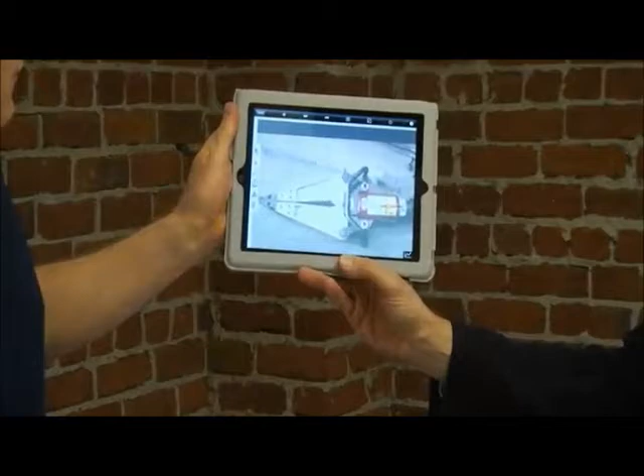What's it called? This is just a model of what I would call the jaws of life. So if you look at a photograph I took here, simple jaws of life - these are the pneumatic devices that are used to pry people out of...

But let's start. What are we even looking at? What application is this?

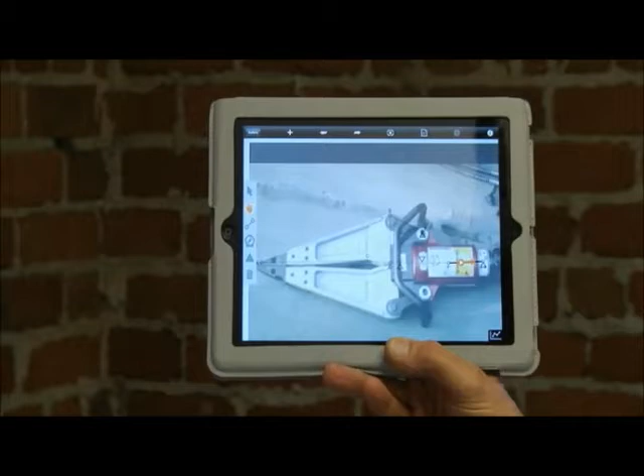Sure, where are we? I'm in a free app called Force Effect Motion. So it's an iPad-based app, right? Is it on Android as well? Soon, soon. Right now it's on iPad. There's Force Effect and Force Effect Motion - this is Force Effect Motion. And these are free. If you have an iPad, go to the App Store, download it, and here it is.

Okay, now this particular app, I took a photo of this, and I'd like to maybe design something similar to this. What I'm most concerned about is I need to size the actuator that drives this whole mechanism. I need to know where the hinges are, but when these open, I need it to open in a certain space at a certain rate. So before I actually design something in AutoCAD, I may want to sketch it up here based on looking at an existing design.

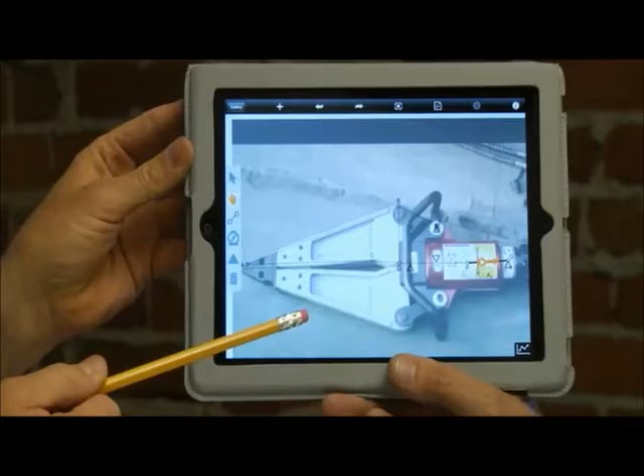So you're literally thinking about the geometry and the force relationships before you're doing the detailed design. I want to validate my motion, especially the tip right now - that was what I was concerned with. How easy was it to just place it? Is it like just sketching a line?

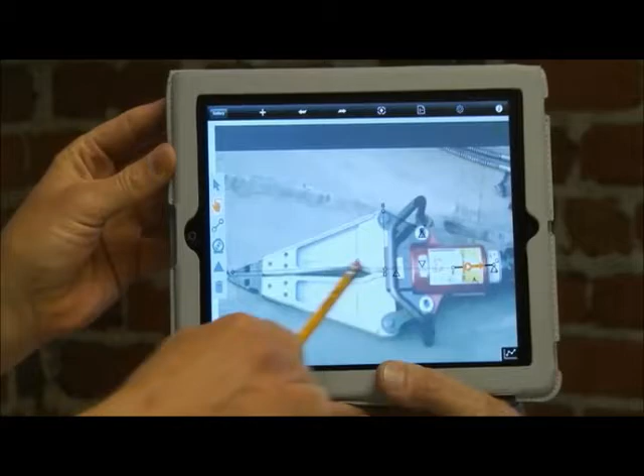Absolutely. You can see I've sketched 1, 2, 3, 4, 5, 6 lines, put an actuator in. All I see is lines in a picture - how is this different than just sketching something?

It's different because I've actually constrained this, and if I press this little button, you will actually see it - now I can actually see it. So you're actually applying the forces now. Applying forces, I have an actuator driving this thing. I have the entire mechanism hinged, so you can see how this opens and closes. And I've defined that point out there as a trace point because I want to see how that point moves, how fast, and how it accelerates.

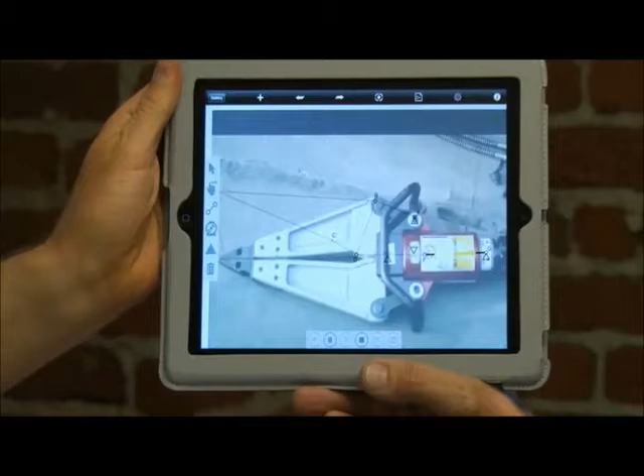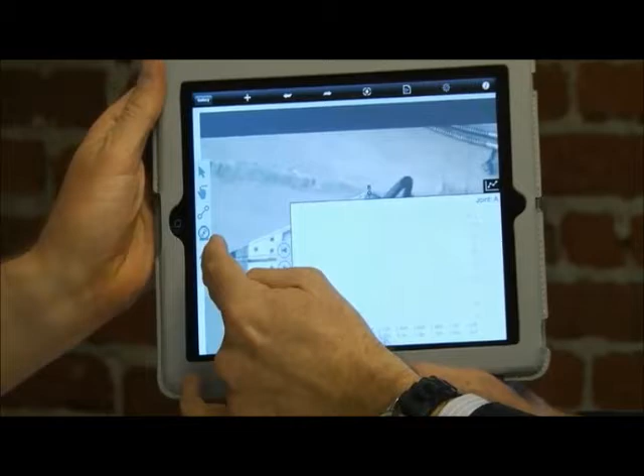So if I stop this for a second, I can take a look and open up a pretty cool little graph that plots for me at joint A, which is out here on the tip. I can take a look and find out how far it's traveled, and in what time. And if I want to close this, I can generate an even more detailed report by just asking for one to be generated.

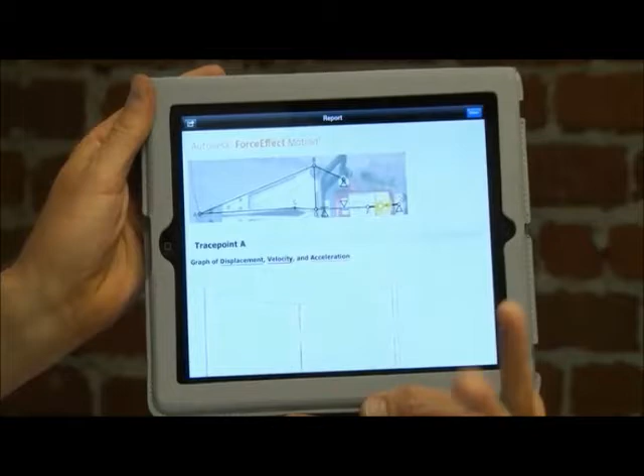And now you see, okay, cool - at Tracepoint A, which was the tip of these jaws, I can look at the displacement, the velocity, and the acceleration as a graph, and then even get a table - a much more comparative view - and you can bring that table into Excel.

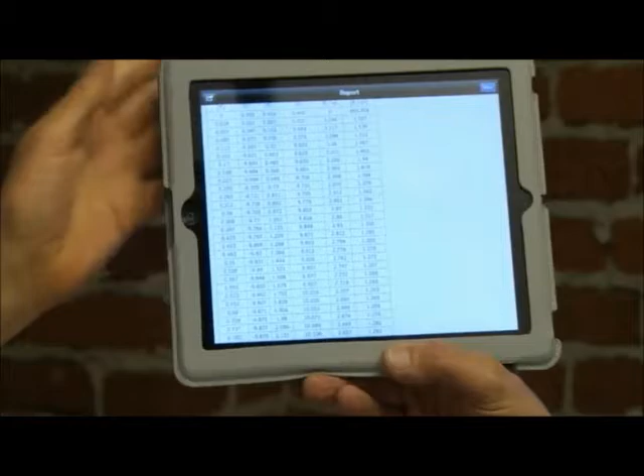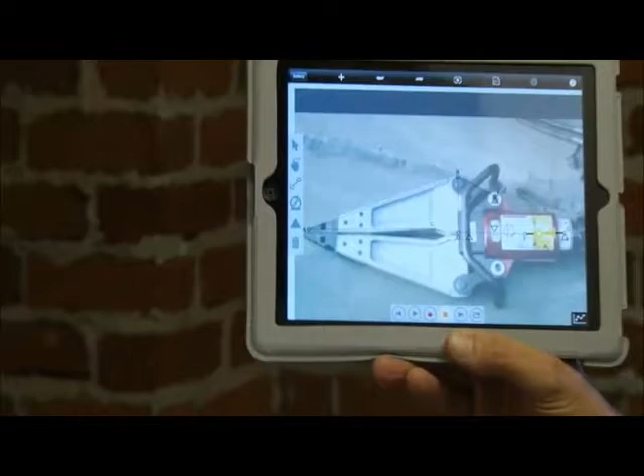So what's always interesting for the AutoCAD folks is how do I work with this in AutoCAD? How is this related to AutoCAD? This is great, amazing - I could be on the bus, I could be at home, whatever, I could start to figure out and play with the forces and the ideas.

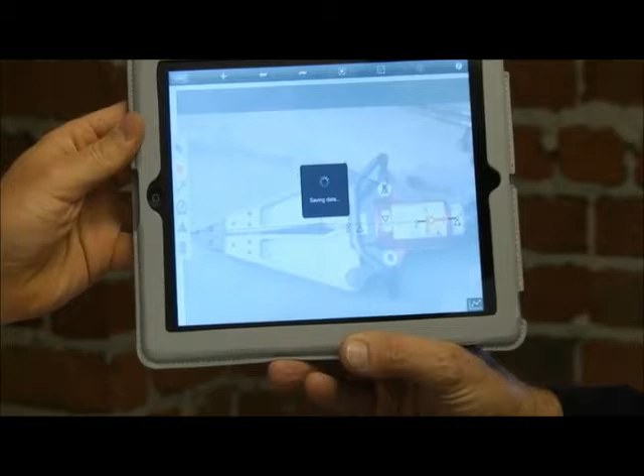To me, what's cool about this is now that I've got the motion I want, I've validated the velocity and the displacement's what I want. If I go back to my original gallery, I'll save it. And once I get back to my gallery in ForceEffect, I have a little button at the bottom that allows me to export this. I can either send the diagram by email to someone, or I can send it as a DXF.

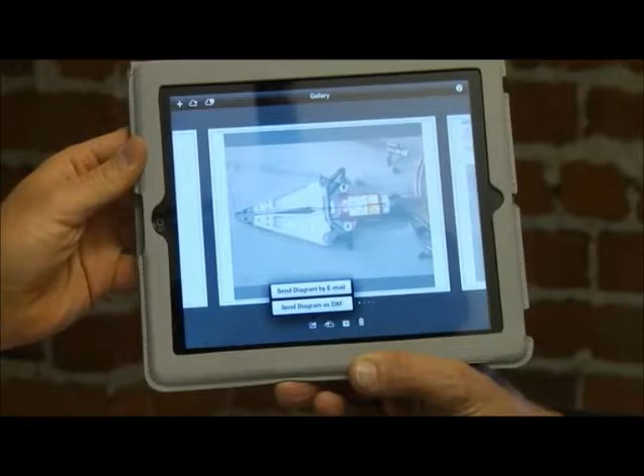Cool, so now I've got the basic geometry nailed down before I start sketching it out. Bring this into AutoCAD, and now I can do my good mechanical design - I can get much more detailed at that. But I already know, hey, the travel at point A, which is what I was concerned about, I can meet it - it's going to be what I want. That's absolutely great, that's great.

Very cool, so this is just a super simple 2D simulation that really helps you get there. And you could do this for a building, for like an awning, anything that's structural related - it doesn't have to be a mechanical product like that. Not at all. And what's nice about this is if I take a photograph and sketch over it, all I need to do is put one dimension in, and everything else on my drawing gets scaled.

I've had guys use the application to figure out how to put Christmas lights on their house. They measured one dimension, and now the house picture scaled up, and they know they need 30 feet of material. Engineers are strange, they come up with odd things. But in a design environment, if I just know one dimension, that's enough.

So are you going to come out with a Christmas light app? No, I haven't thought of that yet. But there's a market for everything.

Okay, well, so that's the iPad. What do we have that's more desktop, that maybe works directly with AutoCAD or kind of next to AutoCAD?

Well, Simulation 360 is our current offering on the cloud. It's an offering that AutoCAD users could be interested in. It's a cloud-based application that offers structural simulation, so you can do linear and non-linear structural analysis. Linear is when I bend it, let go of the load, and it comes back to the same location. Non-linear is when I bend it with enough force that it stays permanently deformed.

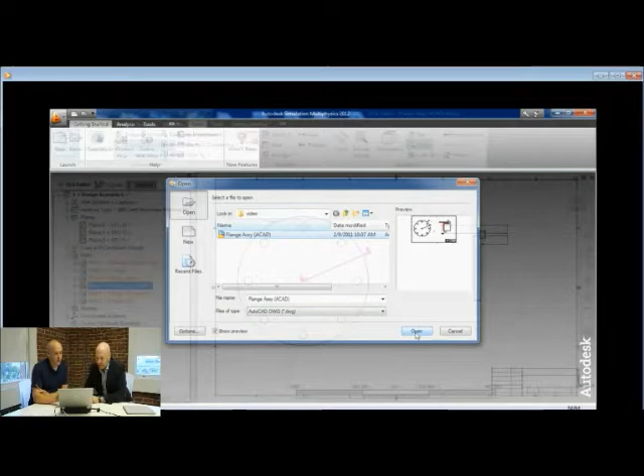Wait, pause for a sec, there were a lot of other files in there as well. So it's not just DWG, you could bring in an AutoCAD file, an AutoCAD DXF, Inventor files. If you so choose to use another CAD system, I don't know why, but you could bring those files in as well.

What's interesting about this is a 2D model in AutoCAD, a flange for a pipe. And what I was interested in was I have to bolt the flange together, right? That's what a flange is, two pieces of pipe coming together. And of course, what do I care about? I care about it sealing properly.

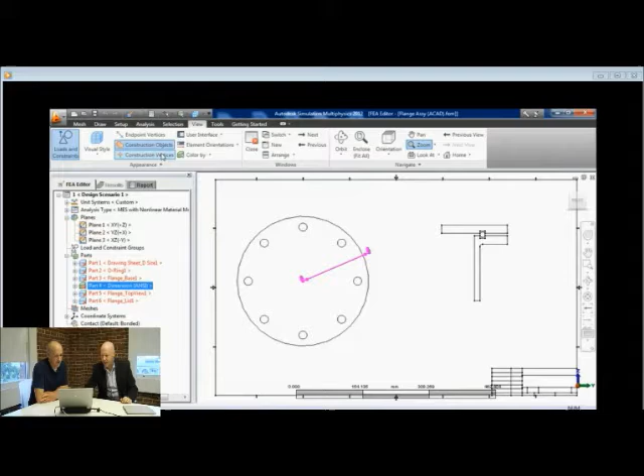So I want to take a look at this simulation and show you that I can import a 2D model very quickly, bring this into Simulation Mechanical. At that point, what I'm looking for is defining what I really want to model. Because it's in 2D, it's easy for me to take this shape, called an axisymmetric image, and if I rotate it 360 degrees, I've actually defined that part. But a 2D simulation is all I need to do.

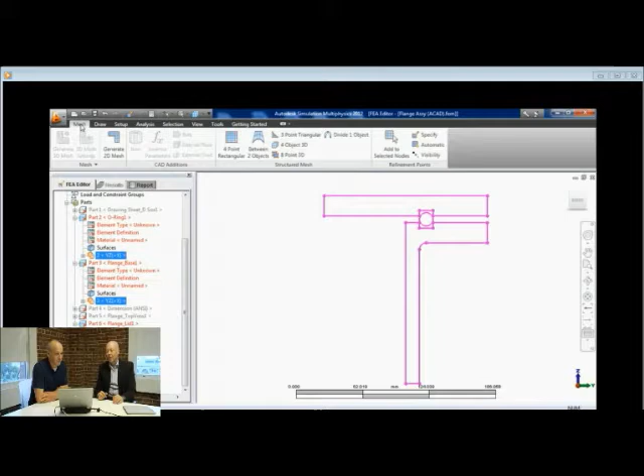I need to tell the program these are the pieces I'd like to create. I generate a quick 2D mesh very quickly, you can see the seal there in the center. Then I go in and tell it what I'm looking to do with it. What I'm really trying to do is define some motion, so I go in and say I'm looking to solve this model. It's axisymmetric, so the program knows I'm going to rotate it, the program knows that's right.

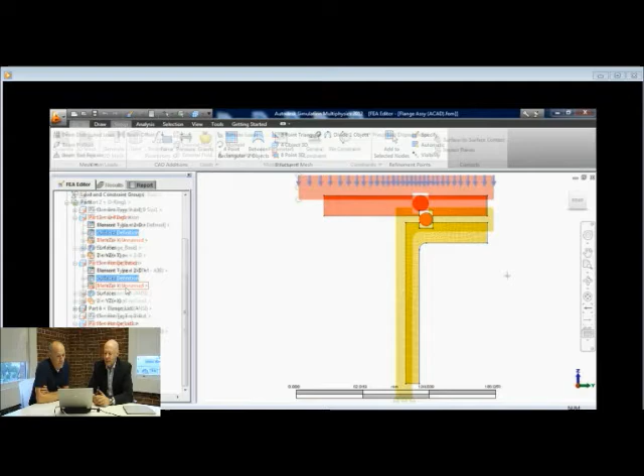I'm only looking at a 2D slice. I impose a deflection at the top flange and force it down over that seal. Once I do that, I want to make sure that seal contacts the inside there very, very well.

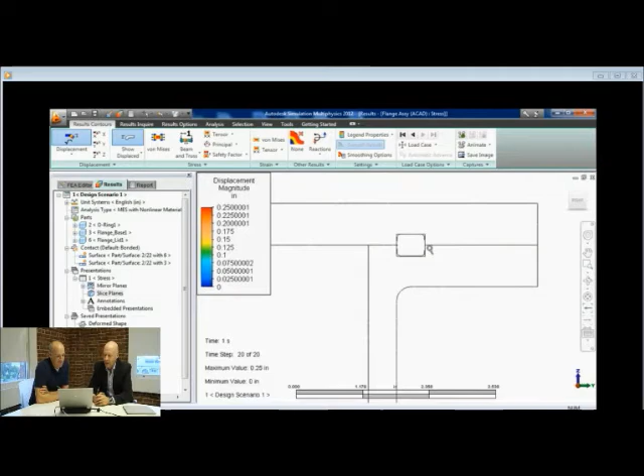So now I've solved this, and I can see the stresses. These are called von Mises stresses - big engineering term. But what I was really looking for was, did I get a good seal in that area? If we zoom in on it, you can see we're not doing bad. We're probably touching about 80% of the surface here. I've compressed it sufficiently that that seal should hold.

And I can see what clamping pressure I have for it. And I can animate seeing that happen.

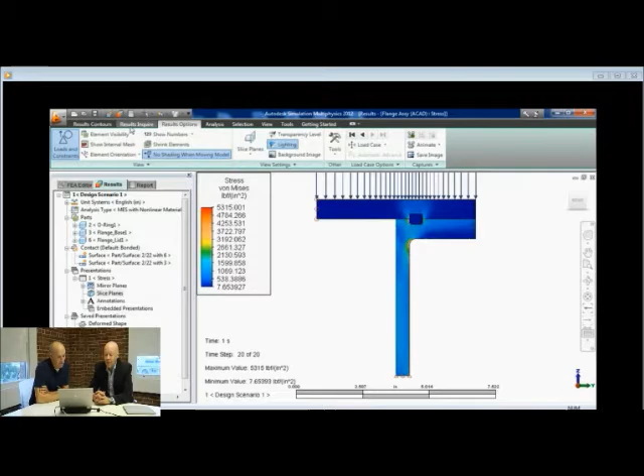What's also interesting, once I've zoomed in on it, if I really want to visualize this in a 3D mode, I can go in and do that. So if I decide later I'd like to look at this in 3D, you can see - so it did the axisymmetric, and now it looks like a real 3D flange. And I did all of that from an AutoCAD model.

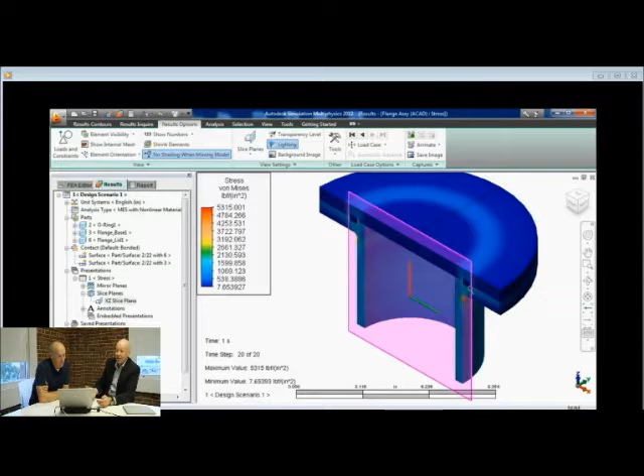So I'm getting very valuable results without having to go to the great difficulty of creating a massive 3D model. I just took a 2D slice of it and did a very vital simulation, which is, what is my clamping force and deflection required?

And you put in the materials? Correct - you'd have to tell the program what this is made out of. Cold steel? Is it aluminum? Is it made out of a polymer or something like that?

So that's a quick example of how a 2D simulation could be very valuable. And again, that was not something that would require a huge amount of time to run that particular simulation. No, that was incredibly simple.